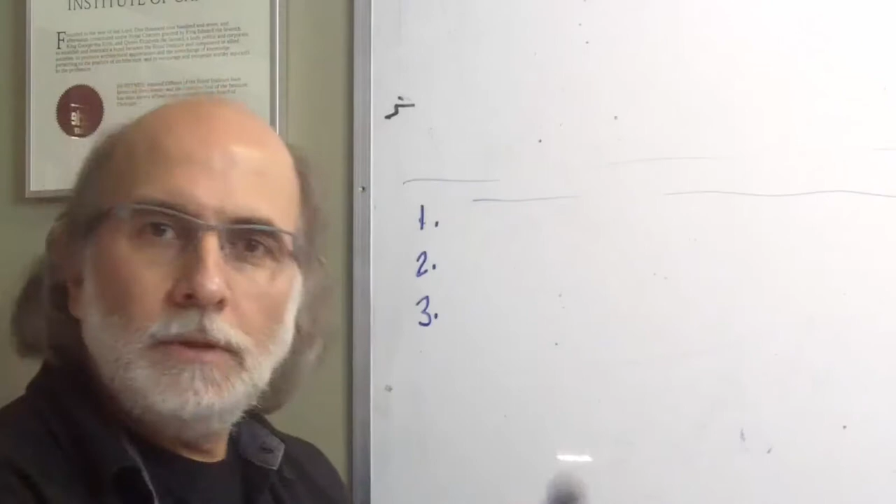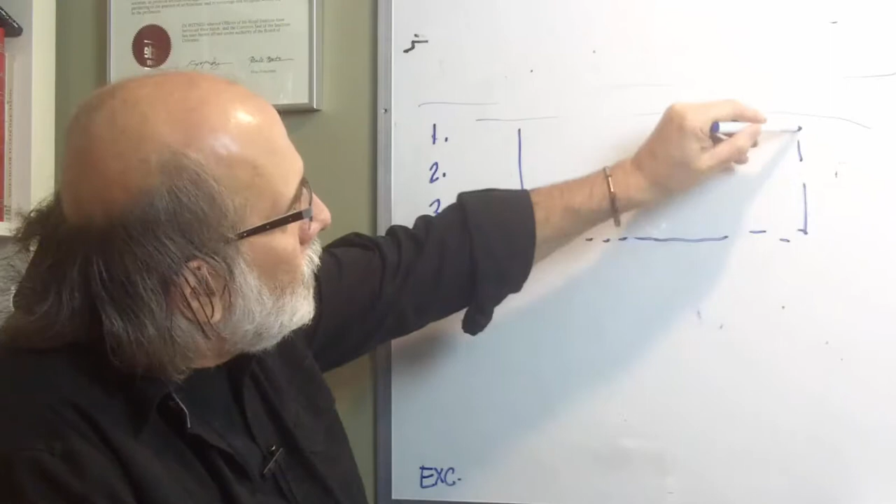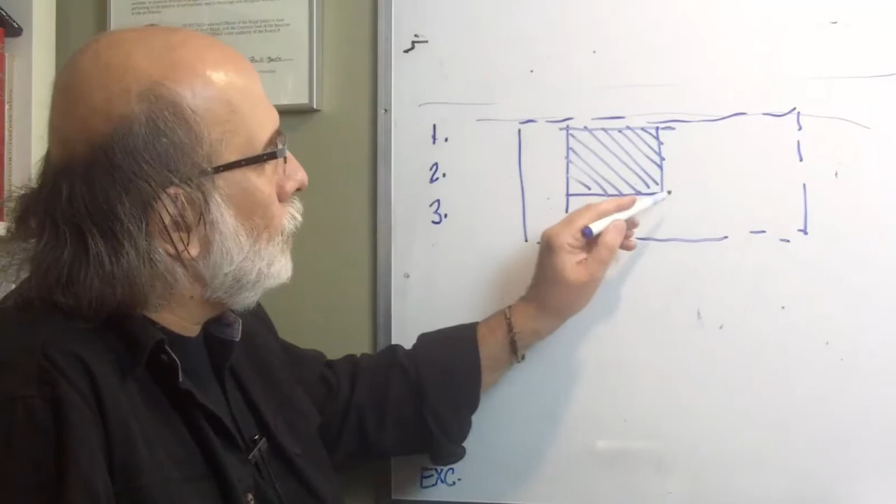So let's go to the whiteboard, and I'll try to make it short and sweet. Now let's assume that you have a property that looks like this, and you have a house somewhere located here. Here I'm referring to the fact that you want to add to your house. Now the question is, can you add to the house? Can you build here, or can you build in the back? Or do you want to top up your home? So that's what I'm going to talk about in this video.

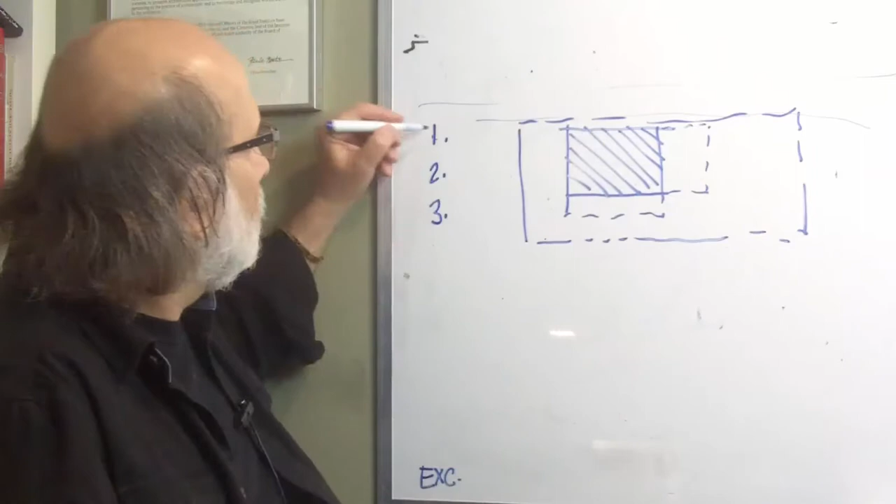Now there are three things that you need to know or need to do before you can answer this question. One, as I mentioned, is to check the zoning regulations at the municipality, whether it's a city or town. You have to check the zoning information pertaining to your property. Why do I call it zoning?

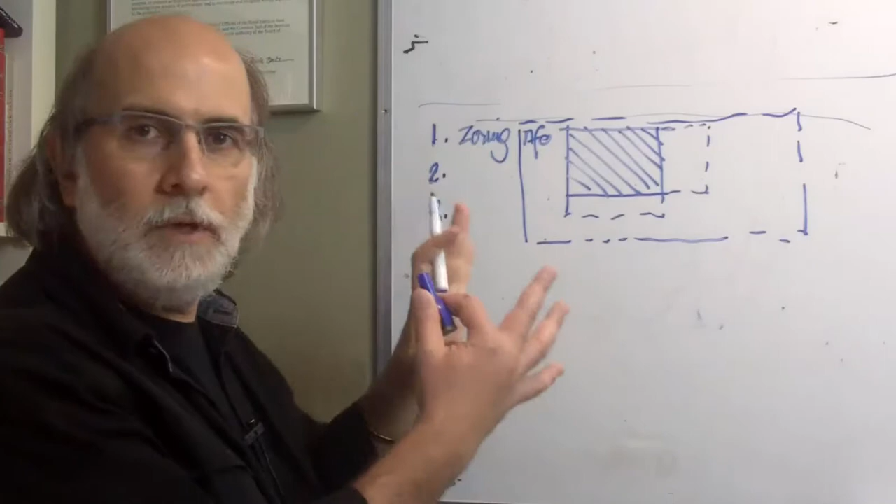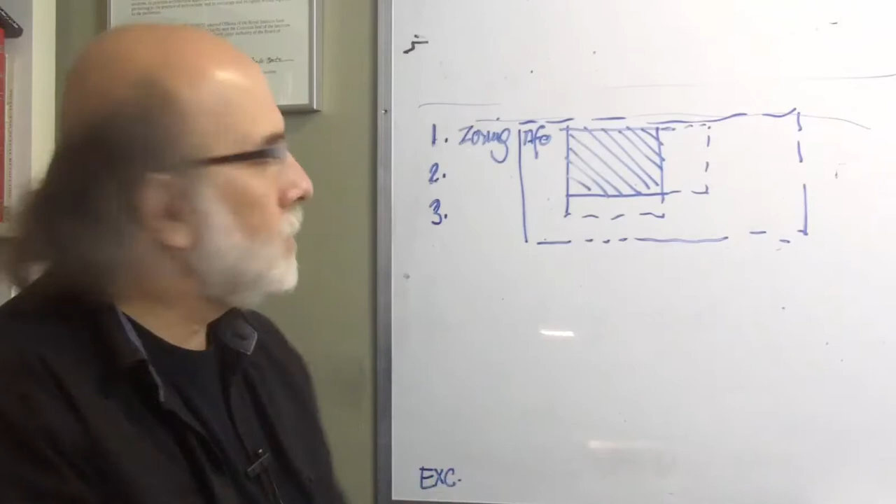Because each city, let's say this is Toronto, has zones - zone number 1, number 2, number 3, number 4, and number 5. Each zone has different, slightly different criteria and regulations. What are these? They are setbacks - how much your building has to set back from the property line. This is the property line.

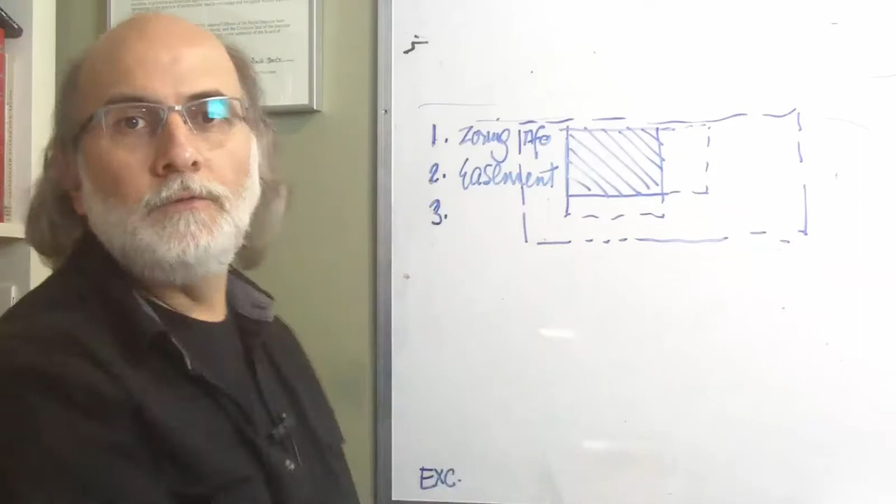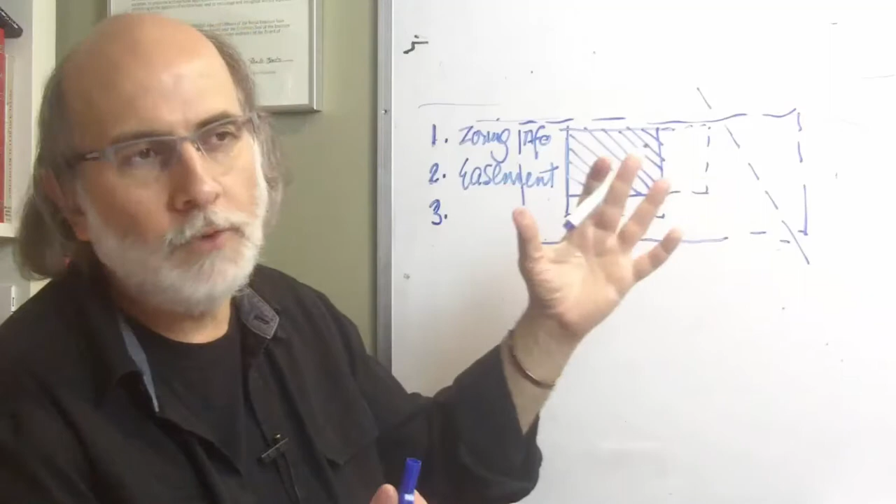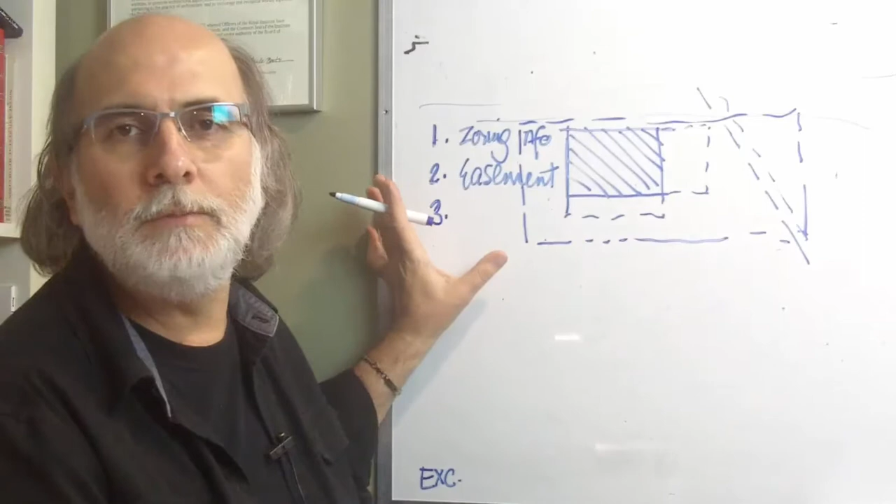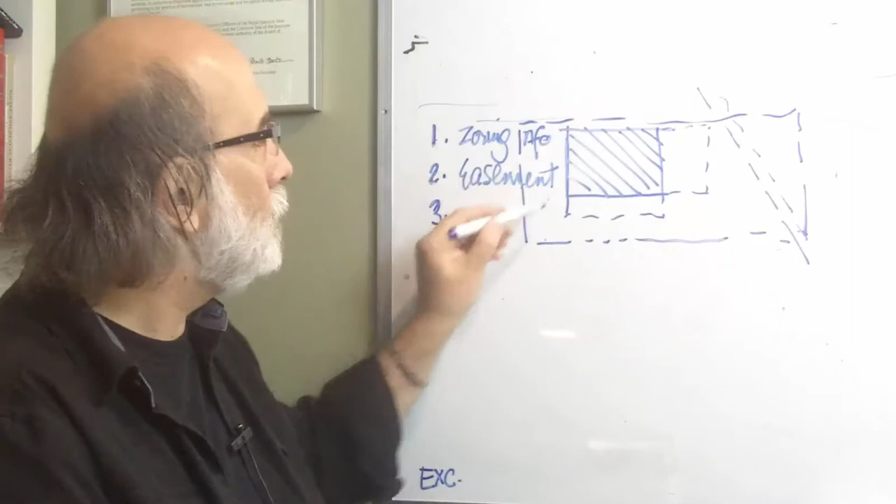Now the city sometimes has easements, and that is covered in number 2. So you have to know the easements. The term means that the city has exempted certain parts of your property for services or utilities. For example, you may have a conduit right here, or a water main pipe. It rarely happens at the rear yard, but any sort of conduit that cuts through your property for the service that the city provides - hydro cables, sewage systems, stormwater systems - this is called easements.

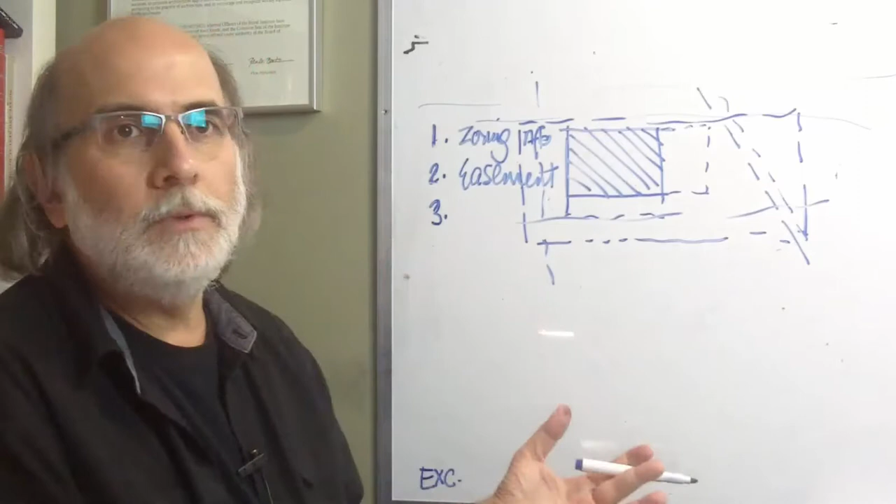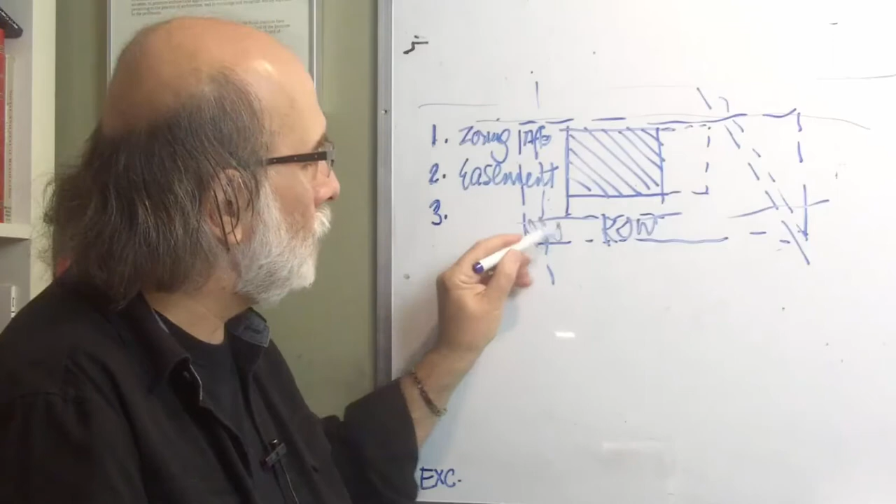So for example, you sometimes have a right of way, ROW, because the city has designated part of your property to access another dead end property. This is covered in number 2.

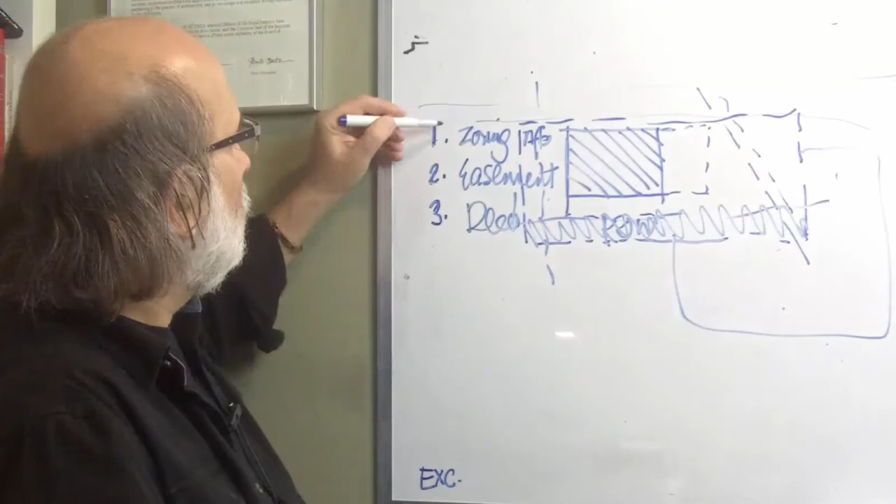Number 3, you have to read the deed of the house or the property to know if there are any liens, any regulations, any exemptions in this regard. So, this is the most important and interesting one.

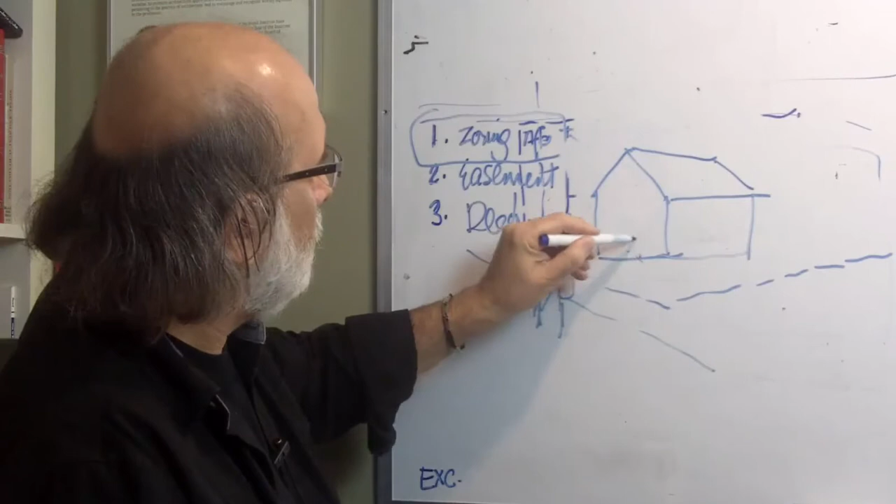For example, I want to show you - you have a bungalow, and this is your property line, and this is the street. These are some people here, just to give you a sense of scale. And this, as I said, is a bungalow.

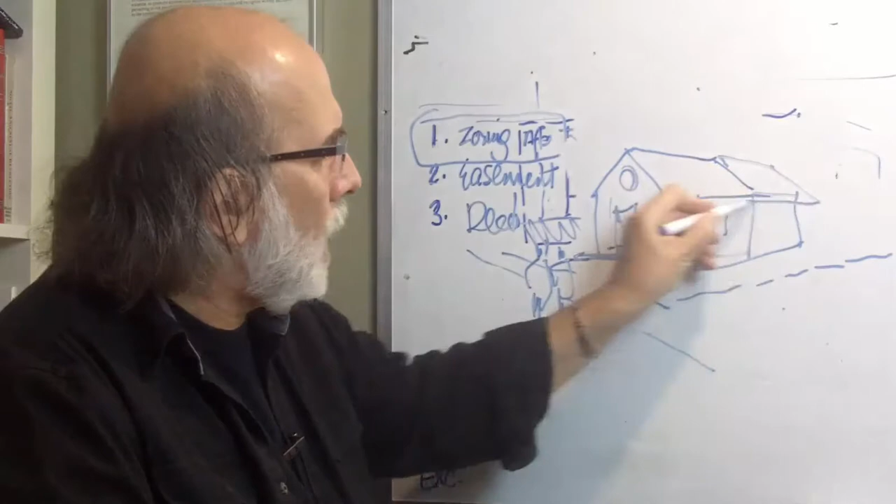Now your question would be, can I build? Can I build, and where? Can I build here? Can I expand this portion? Can I expand to the back? Can I top it up? So I'll remove the roof and probably add...

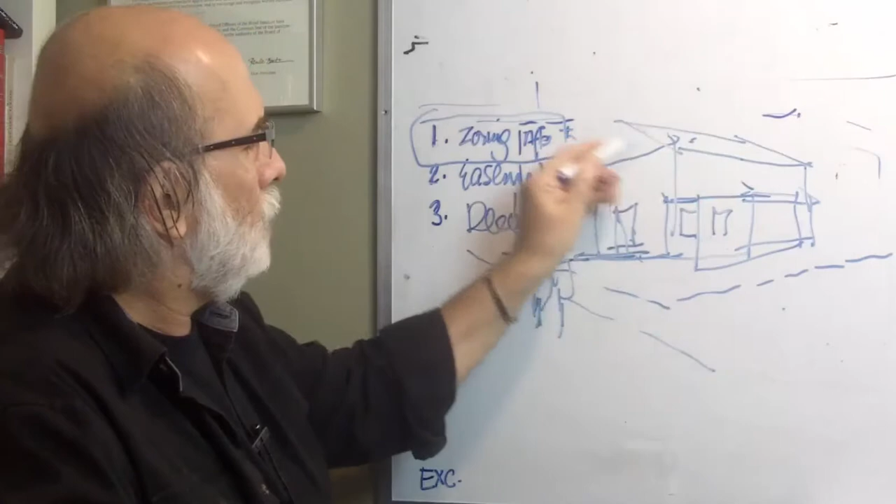Another floor here. So the other question is, what type of roof should I be putting? Is it a gable roof again, or pitched roof, or hip roof, or maybe a flat roof to make it look modern - something very modern and contemporary.

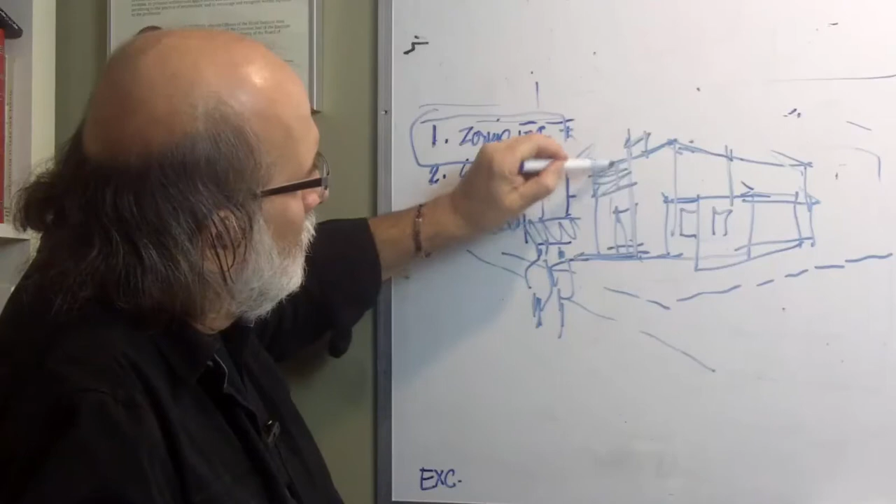So all these questions start here. In other words, yes you can build, and no you can't, and it all depends on the zoning information. This is your first step that you need to do in order to answer your own question.

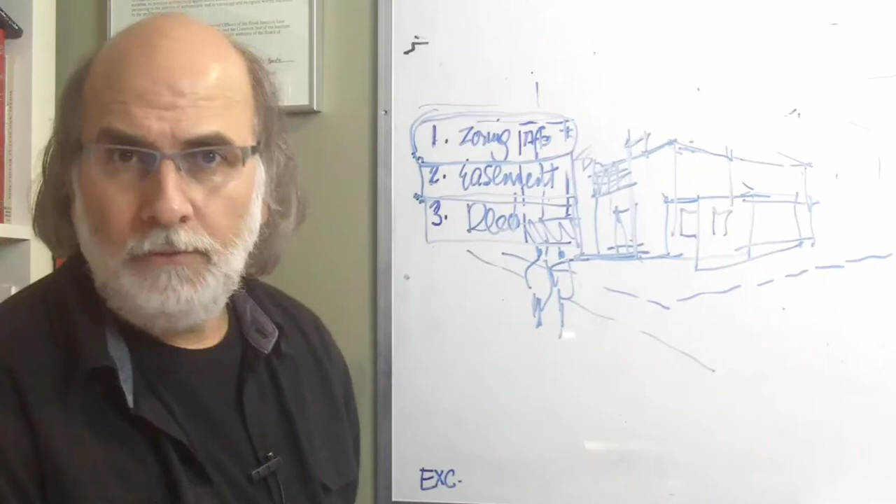You could take that information from the easement, from the municipality, or from a survey drawing usually issued by a surveyor. You can also refer back to your lawyer or your deed and read through to understand if you have any restrictions on your property.

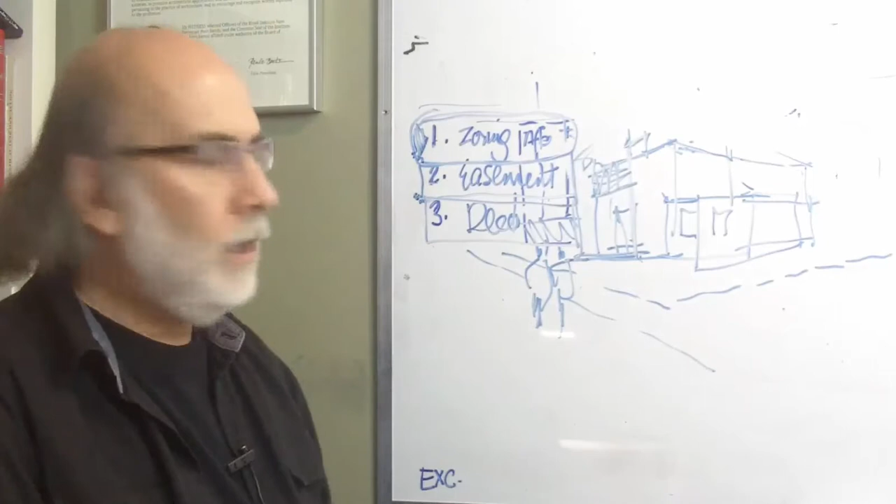So I would start with zoning, and in order to get zoning information you have to visit the website of the city, municipality, township, or county where you live, or visit them in person and inquire about the zoning bylaws pertaining to your property.

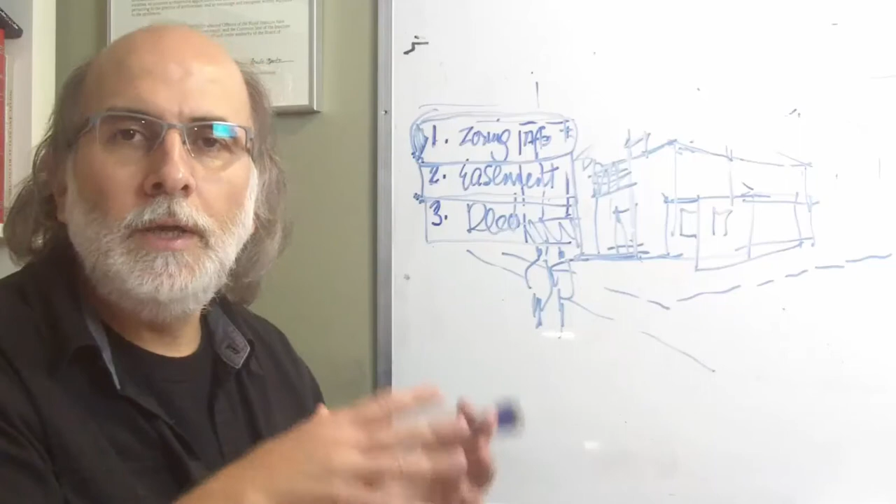And for people who live in the city of Toronto, they can visit the City of Toronto website, where there is something called the interactive zoning map.

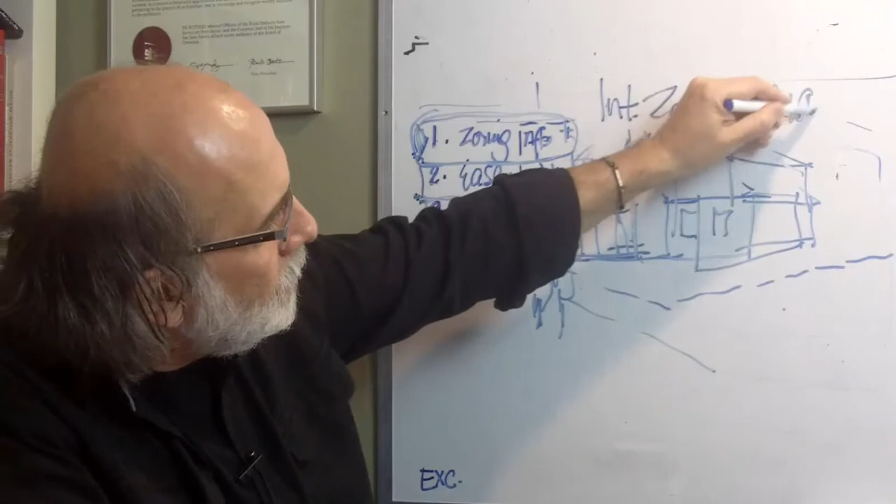This map will allow you to type in your property address, click enter, and it will focus on your property. Then you hover over that property and you would see all the information pertaining to zoning.

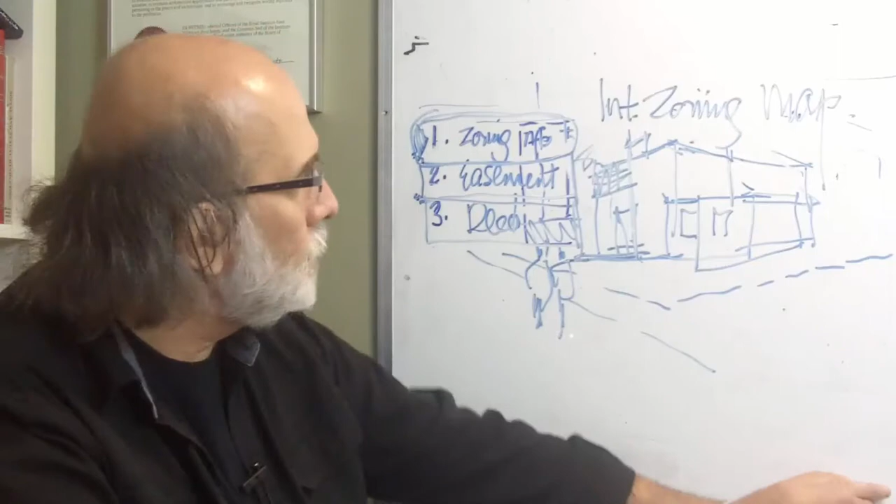Now before I finish the video, I would like to tell you what you'll be looking for. This is your property, this is your building. Or if you're building new, then at least you know if you demolish the existing house, or it's vacant land, then you would need to know the following: setbacks.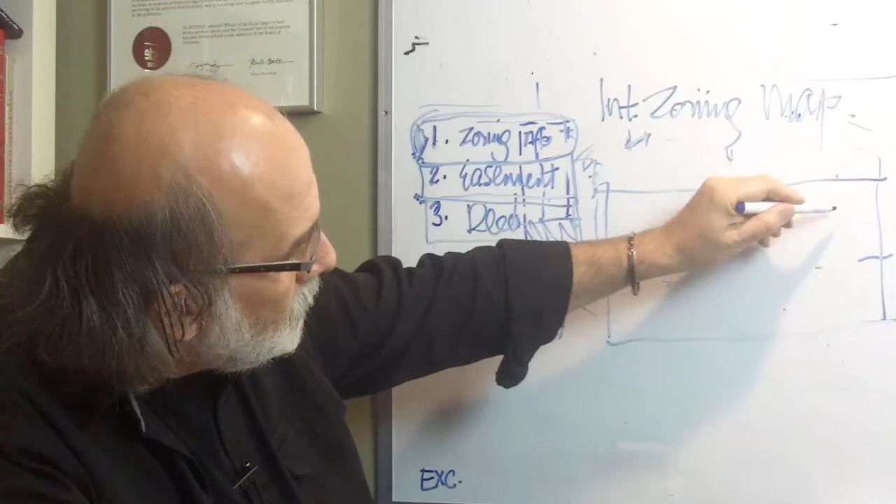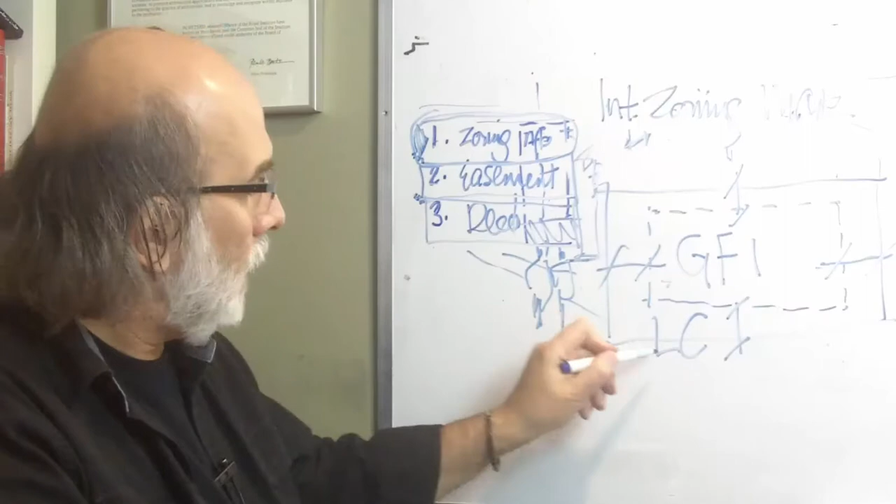These are called setbacks, the GFI, and the LC, lot coverage - LC and GFI. Now the LC is this, and the GFI is the total buildable area.

Once you check all of this, you would be able to answer the question: can I build? Why? Because if you have no structure whatsoever on your property, then you can have the maximum buildable area because you're starting from scratch. But if you have a structure there, or a bungalow, or a house, and you want to know how much you can add to that house, then you would first have to know the GFI.

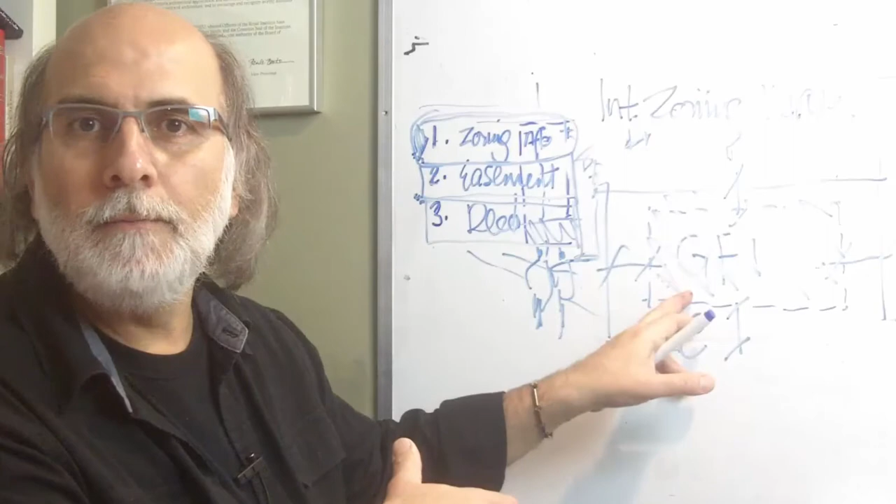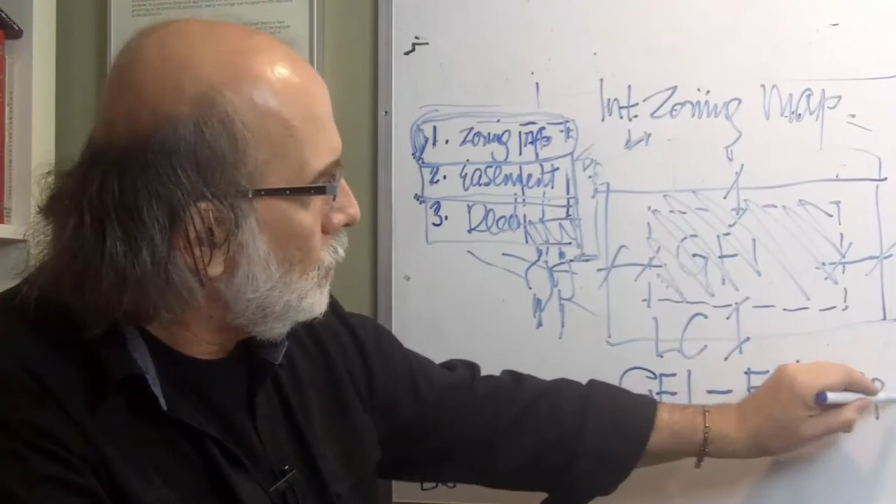And then minus your existing square footage, and then you get your answer. You get an X amount of square feet that you can build.

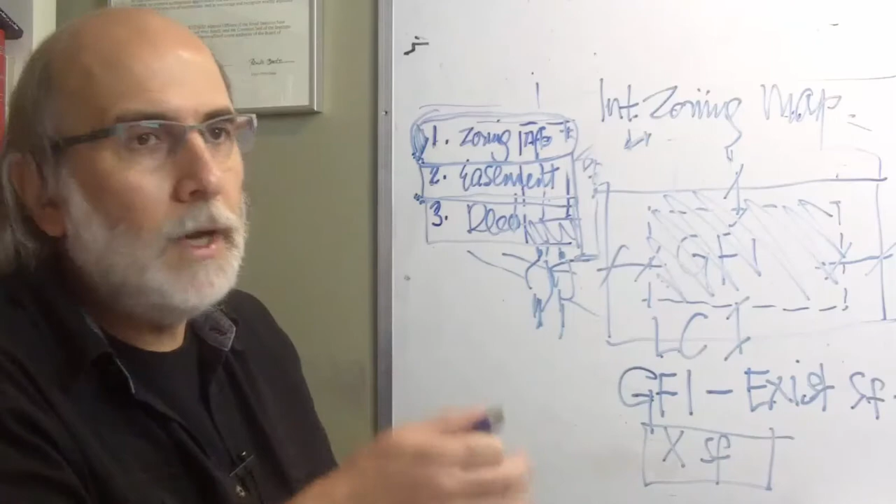The other question is where? Is it in the backyard, like the addition would be to the rear, to the sides, to the top, or to the front? That would have to be answered through other zoning regulations, which are basically the setbacks, the building height, and so on and so forth.

So your exercise now is to go to the interactive zoning map and get a little bit acquainted with it. Try to look up your property and see if you can find it, then try to bring up the zoning information, play around with it, and see if you have an understanding of what the zoning regulations are.

And if you have any questions, please post them to me so I can answer you, and hopefully help you get through this annoying stage of the design process, or generally the building process.